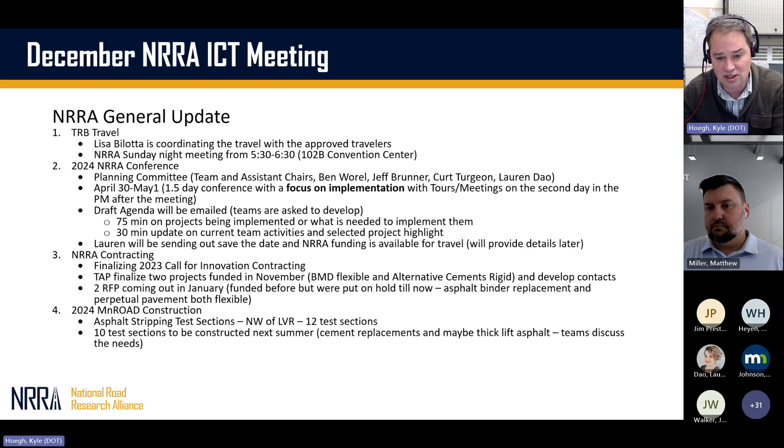So the two projects that we got our overview on last week for this group, as a reminder, are up on this slide here. Thanks to Dr. Nazarian for giving us a good overview last meeting, and thanks to Dr. Zegeye for making a lot of progress behind the scenes on what's needed to get that project funded. We're still working through a few things, like making sure we have a site to do our evaluation of applicability of NDE methods or NDT methods for the other project, but we're making progress and it's getting closer to being able to get that project started too.

So with that, we got a question from George Chang. Go ahead, George.

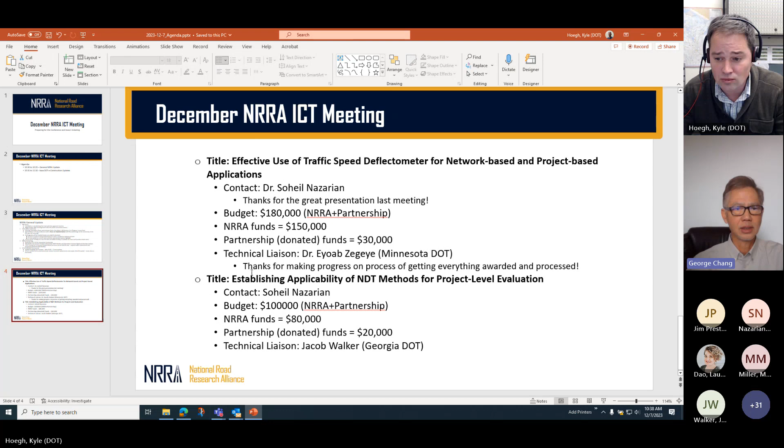Yes, I would like to share - we mentioned a couple meetings ago about having NRRA support the ISIC conference in September next year. Let me just chat here - it will be September next year. I'll share the link. From September 10 to 12 in Orlando, Florida. We have pretty much the program and the venue all set, all finalized.

So we'll send out a brochure to this group soon. Great, and then maybe, George, we can work together on that follow-up email I'll send from the meeting today. I'll also include some information on that, since that'll be of interest for this group. Thank you, yes, thank you, George.

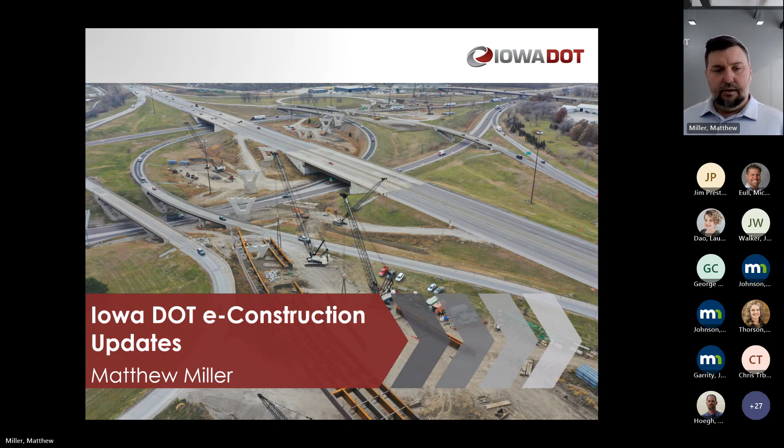So here's our Northeast Mixmaster project. It's a big project in our area that we're working on right now. Let's see here - so the first thing that I had to do coming into my position, I work with Sean Blazing, she does our GIS work in operations and maintenance, and Thomas Hamsky out of design. There's really been an effort to try to better communicate and connect some of those pieces. So the first thing that we do is we look at our project life cycle.

At least in Iowa, and I'm sure a lot of states out there are probably very similar, we start at survey, we create the CAD file, it goes to design. They create some electronic files that go to the contractor for sure, but ultimately the most important plan document is the PDF plan sheet. We get that in construction, we redline it, we create our Excel output files, and it goes into our electronic records management system. Then basically operations comes out and remaps everything with GIS and maintains the assets through GIS up until the point of survey, where we start the whole process over again.

So there's clearly some gaps there. Obviously, at those breaks, we're losing data and it's not being captured efficiently or quickly. So we want to address that.

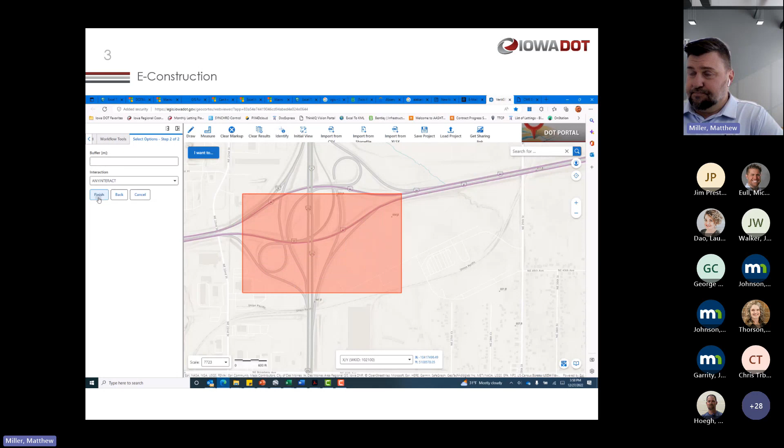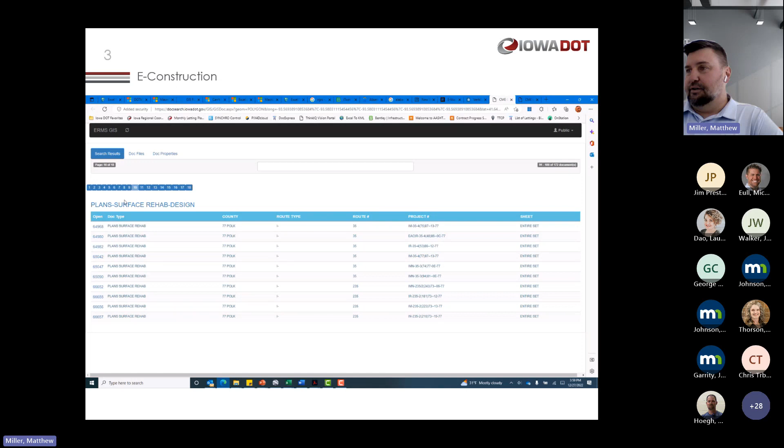Just to give you an idea of what our ERMS system looks like, it's on our GIS map - we can put a square out there and find all of our plan sheets. As a construction supervisor, I would have to go dig through some of these as-builts in the event that we had to repair something in the field, or in one instance somebody wanted to replace a light bulb. After a couple of days of searching, you can see I had 18 pages of plan sheets to dig through, and each one of those plan sheets may or may not have thousands of pages in a PDF that you have to scroll through individually.

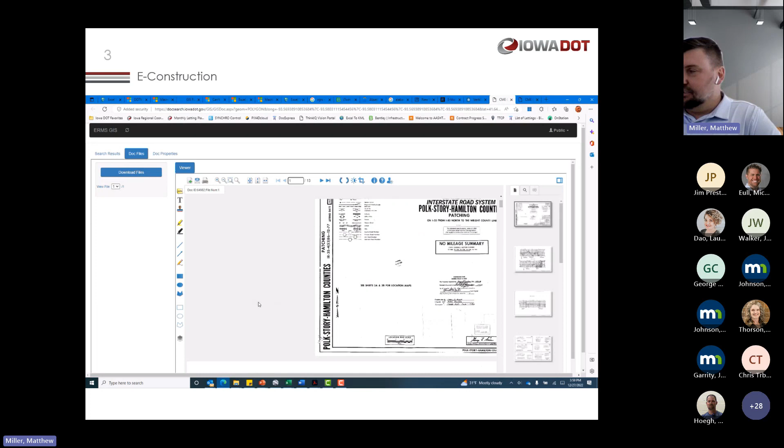It's a completely unsearchable database. You just basically have to have an idea of where you're looking, what sort of plan set it is, and hope that somebody wrote down the information you need - very inefficient. So we want to address that. The first step is probably, since GIS takes up half the life cycle, to include GIS through more parts of the life cycle. We've got these different file types like IFC 4.3, Synchro, our Excel files, our XMLs - probably very similar to what everybody else has. And then of course we've got AASHTOWare Project implementation going in there for us, and then bridge and pre-construction. So a lot of different software that's out there.

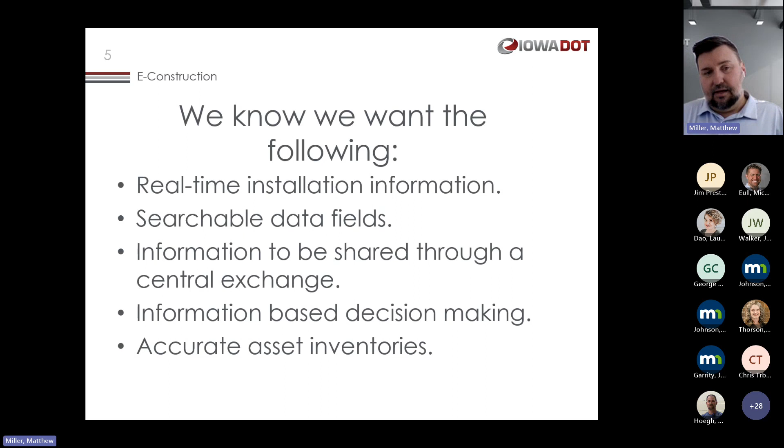We know we want to get to this point where we have real-time installation information, searchable data fields, information that can be shared through a central exchange if that's possible. Nobody wants to really maintain databases anymore—it's really just connecting databases through APIs. We want to be able to make information-based decisions, and we want accurate asset inventories. So this is where I come into the picture.

We have various initiatives going on between e-ticketing, GIS maps, 3D projects, drone LiDAR mapping, digital as-built, and technology pilots. For us, moving to an e-ticket portal—like we had started developing something like this during our I-74 construction—because we have all these different e-ticketing platforms out there: Fleet Watcher, SOP, Haul Hub, Connex, Istrada, Libra, Apex, XBE, TruckPay, Broadloop, Ruckit, Engage, BCMI, Trux, Astec.

We can't teach our people to run all these different softwares and accept tickets from these places. Plus, we've had some awkward conversations over the years. I remember Cedric telling us that he was asking Istrada to give us some air and slump fields that our inspectors could put in there. It's just an awkward conversation because you're dealing with a vendor that works for a supplier that's hired by a contractor that you actually have a contract with. So it's a very odd business relationship.

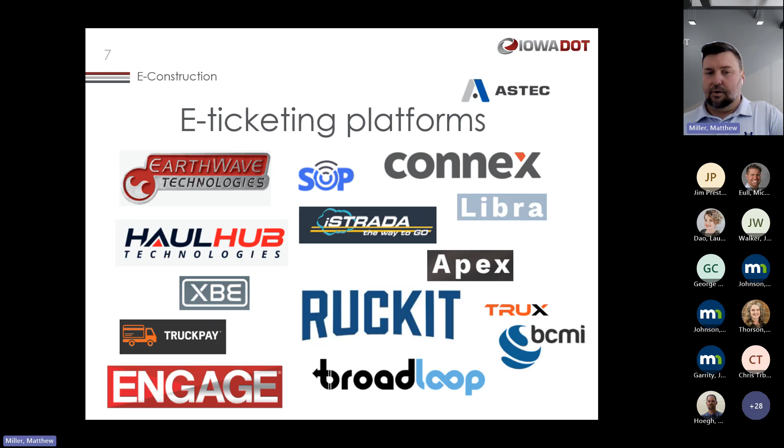So we want to pull all their information in through an API, organize that data, and send it to where we need it. That's where we started with Command Alkon and Infotech, and then eventually went to Haul Hub after an RFP process. Our information on an HMA ticket, e-ticket, is really basic.

We ask the same stuff that we asked for in a paper ticket—we ask for 12 data fields. On a concrete ticket, we're looking at 21 data fields. What we're able to get on an e-ticket is about 275 lines of data, so we're getting every part that's going into that material. We think this could eventually replace the plant report, potentially—you're essentially getting a plant report on each truck, which we would assume would save time.

There's other things that we're looking at too, like EV truck tracking, being able to evaluate production capacities and when projects could be complete. So there's a lot of really interesting stuff going on with e-tickets.

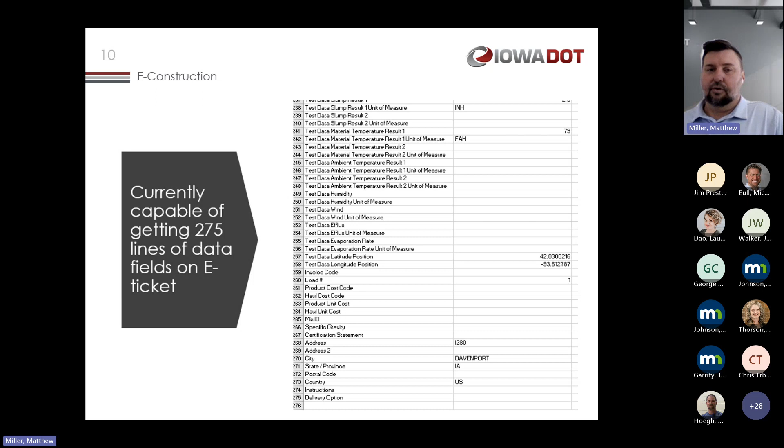The way our e-ticket platform works is if you have an e-ticket provider, which a lot of our contractors do, then we can just connect through an API into our system. If they don't have something, or if something doesn't work quite right, we can do a direct connection to their system, and both have shown to work pretty well for the most part. Occasionally, when we're dealing with two vendors that have to connect, they've got to get that data mapped correctly. There's also other possibilities of third-party integrations.

We've explored something with OnStation, which I'll get to in a bit, but we're looking at that now. We're actually kind of thinking being able to pull station location from something like OnStation will probably actually go into our GIS system, and the e-ticketing app will actually pull that data from our GIS system to track that. Essentially, it goes into our main portal, and then we can forward it out to AASHTOWare, DocExpress, our GIS system.

One of the first things that we had to deal with, and I think anything with digital construction, you have to look at this as internet connection. So we got a STIC grant, and we explored satellite. We explored various connections. Satellite was pretty much a non-starter for us because of latency issues—we had heard that it could take 30 minutes at points to get a message from them. So we're like, that's not really going to do anybody in the field any good if they're waiting 30 minutes for their ticket to show up, and it's left the project. Also there were some issues where they might have to set up a tripod and actually point a satellite in a specific direction in the skyline.

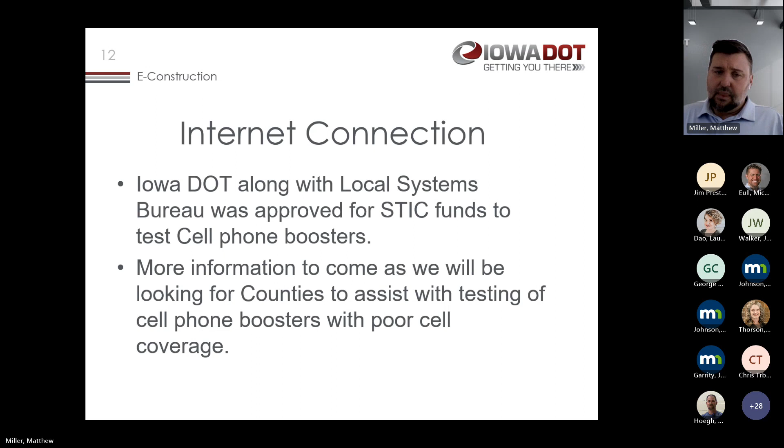So we looked at these suitcases, and we purchased them. They were recommended by the cell provider. It's a rugged suitcase that puts off a 300-foot Wi-Fi in all directions. We've had as many as 20 people connected to this.

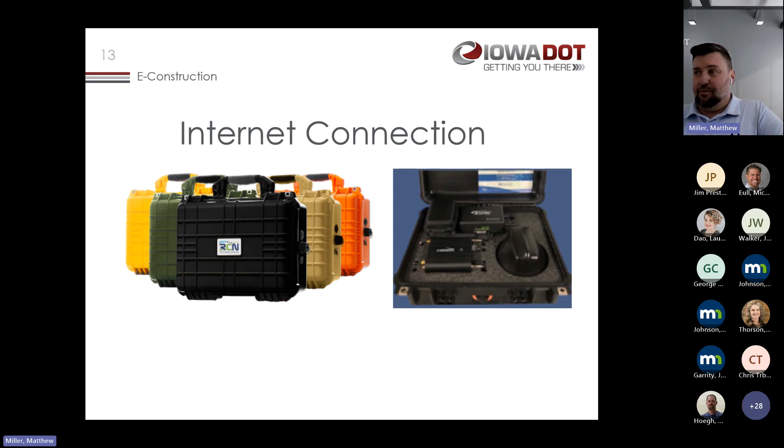We actually did our AASHTOWare training in our field offices using this, because the internet connection was poorer in our own offices than it was on this device. We sent somebody out, and I tried to test it out myself. I drove 50 miles, I live in the metro area, and never got off 5G. So we sent this out to somebody who knew about a dead spot where they had no service, and they turned it on and got a pretty good signal.

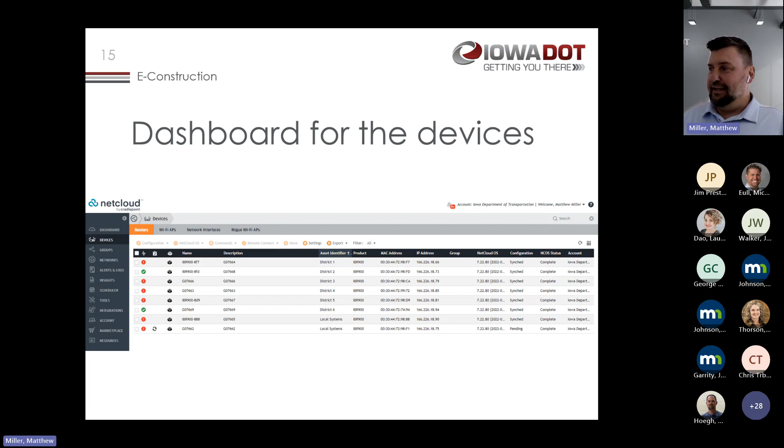It's got this dashboard where we can actually see where the devices are, who's using them, how much internet they're using, and it even puts it on a map, so we can really manage where they're at.

The feedback we got from local systems, though, is they didn't really want to buy this thing. They don't want to maintain it, they don't want to have to do anything like that. Plus, if we put it in the spec, we could get federal participation with it. So I wrote a DS, which basically specs out the case. I'm hoping this can be like my FHWA 1985 'you can use computer on construction jobs' memo, that pretty much covers us with all of our e-ticketing and any electronic endeavors. And if satellite does improve and goes beyond this, it's basically meet it or beat it. If you can beat these specs, we'll accept that.

We do figure that the contractors will probably build in most of their costs on the first bids, but we expect those bid prices will eventually go down. The units themselves are about $2,500, and in our case it's a dual SIM, so you have two cell SIM cards at $40 a month each, about $80 a month to run the equipment. But you can see exactly where it is and who's using it, so it's fairly easy to maintain. I'm hoping this has a second effect where the contractor has these in slow parts and maybe uses it themselves, finding value in getting connected and providing better feedback on their own systems.

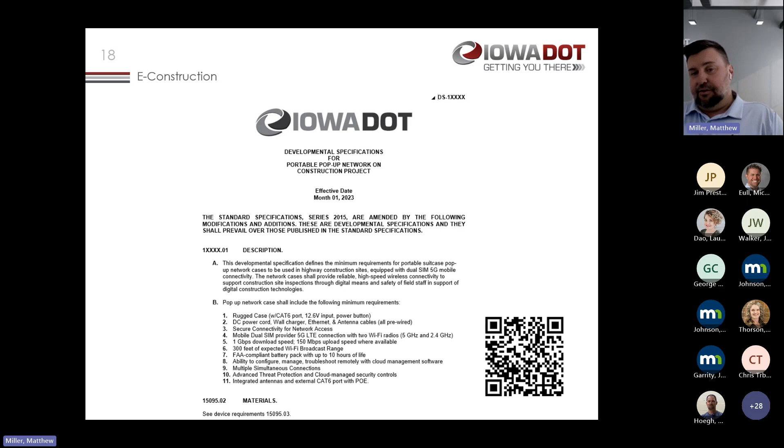It's really technical, it just goes into all the specs that were in that suitcase. We found that you could buy this off the shelf through a company like RCN that can put them together—ours is $2,500. Michigan actually built their own, basically using these specs, and just had to buy the components and put it together. I think they said they paid about $1,800. So somebody could determine if $700 is worth building it yourself or not.

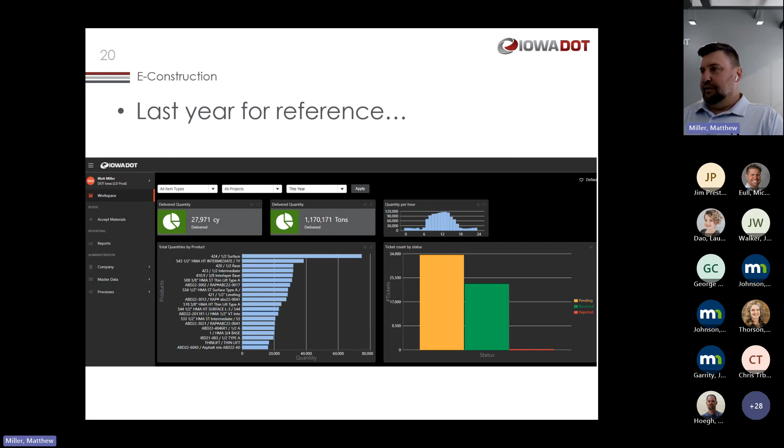So last year with e-tickets through Command Alkon, Infotech, we had completed about 28,000 cubic yards of ready-mix concrete and 1.1 million tons of asphalt. We had several projects, and some of that did tie back to previous to that year, but that was about what we had performed at that time, going with 100 contracts.

This year has been a little slower, but we've connected a lot of lower quantity projects. We've actually connected over 200 contracts since our contract started with Haul Hub in about the middle of April, so we started connecting jobs right away. We hit 200 contracts in 7 months, and that was our goal for a year. We're getting a lot of projects connected, getting people using it that hadn't been using it before, and that involves about 350 different connections between contractors, suppliers, and us.

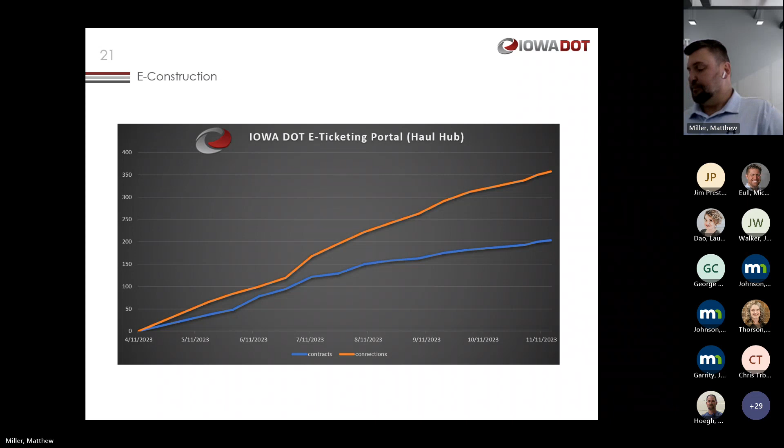Material-wise, asphalt's clearly the winner, hitting close to that 700,000 tons mark. But ready-mix concrete is moving up very quickly—you think 27,000 cubic yards before, well we're at like 170,000 to 180,000 cubic yards this year in 7 months. They're moving pretty quick.

We've also got some aggregates connected, not all of them, and I'm working on getting some of the bigger aggregates connected, like Martin Marietta. They've actually connected in other states, so I would think it wouldn't be too hard for us to get connected too. Some of the aggregates we've reached out to, some of their stuff's computerized, others we're still writing hand tickets. I'd love to get every one of theirs, but I'll take the computerized ones for now—we can deal with the handwritten ones. But all the ones getting computer-generated tickets, let's get that information in, save our people the effort on those projects, since most of the time those are the larger ones.

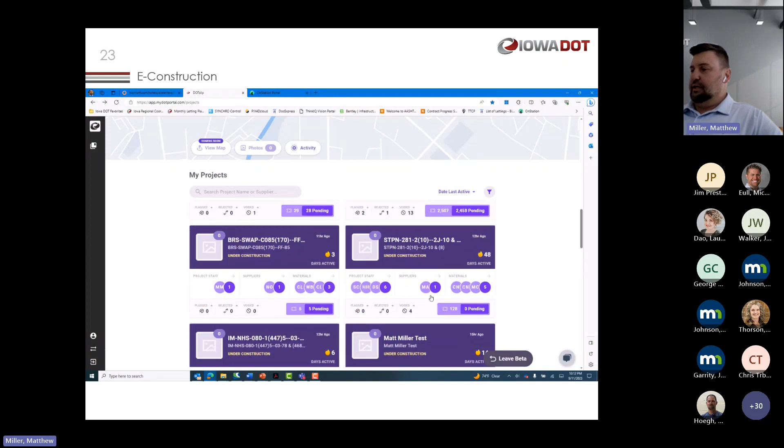When you actually click into one, you can see one thing too. This is the one problem that we have in Iowa: our contract number might have many assigned project numbers. This is the one thing we've noticed digitally, and one of the things that prevents fully automating the connection process is I have to bundle those into a single line a lot of times.

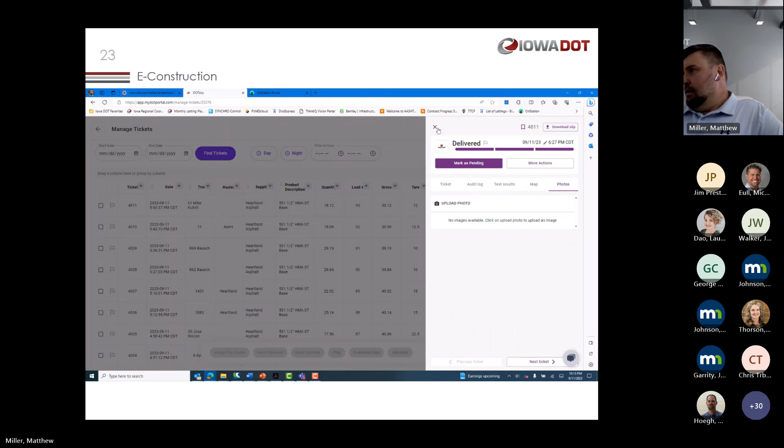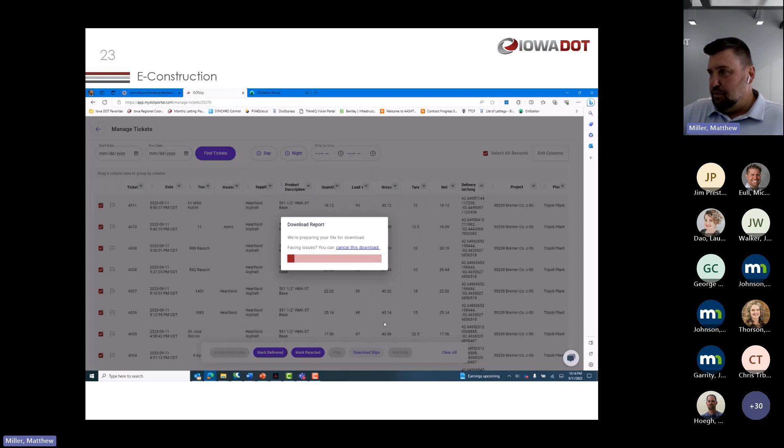So I'd actually worked with ChatGPT to create a macro to create a Google Earth file. I could have made it through an Excel sheet, download a CSV, do this, but I actually sent it over to Haul Hub and said, can you just make this an output on your website? And so they created it, and it pulls all the fields in. Then you can open up a Google Earth file, and it'll take you to where all these tickets are and show you all the fields.

When we download that, we zoom in, and if you click on any of these ticket locations, it'll give you all the data that we've recorded from that ticket - item number, how much weight was in there, design thickness. In this case, there's a lot of whatever fields were captured that we can report.

And this is all a precursor to moving it to our Esri system. So you can get a lot of data, map it, and start to really see what you have out there. Of course, you get the CSV files, and you can get PDFs if you need those as well for all of your project documentation.

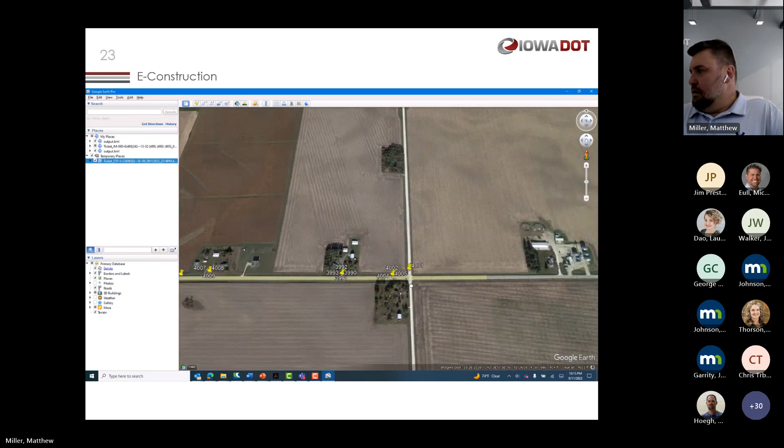One thing you'll notice is some of those tickets will be offline from the roadway. That's because it's marking where the inspector's at, which I'm working on through the spec. Ideally, we would get to a point where there's some sort of electronic proof of delivery - either a camera, a smartphone application, GPS, RFID, or one of these other methods that would actually put it on the contractor to prove that the delivery had occurred.

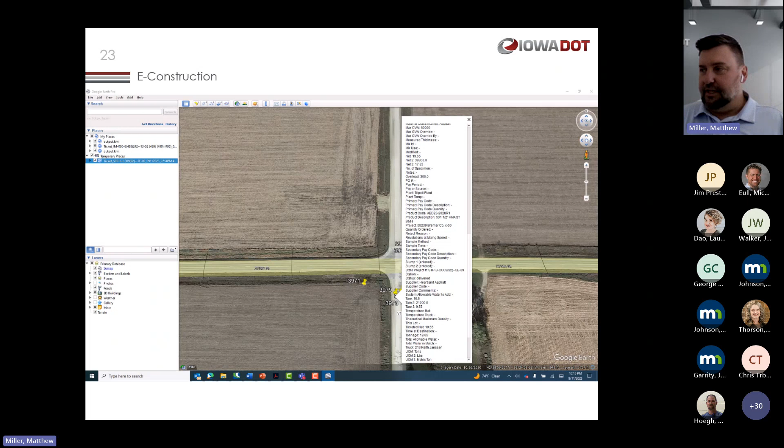You can see that we can see all the loads, and which pay item it's attached to. So the fact that it's off center doesn't really bother me because I can tell if it's mainline or not. We are working on ways that we can maybe associate that more to a shape rather than just a dot on a map - but we'll eventually get there. The fact that we have these on a map in the first place, I feel is a pretty good accomplishment.

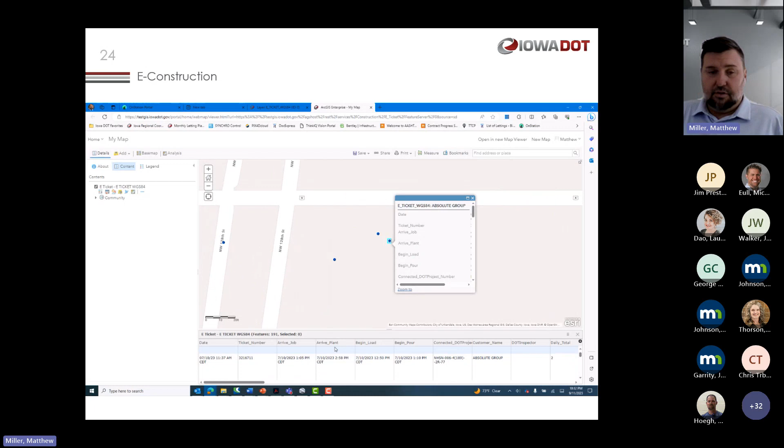We don't even have all the analysis tools on here, but we did some examples of what the analysis could look like for this case, where we have a time lapse. You can see the scroller down here and the time changing, with each load as it comes into the project. So you're actually seeing the project built digitally in front of you.

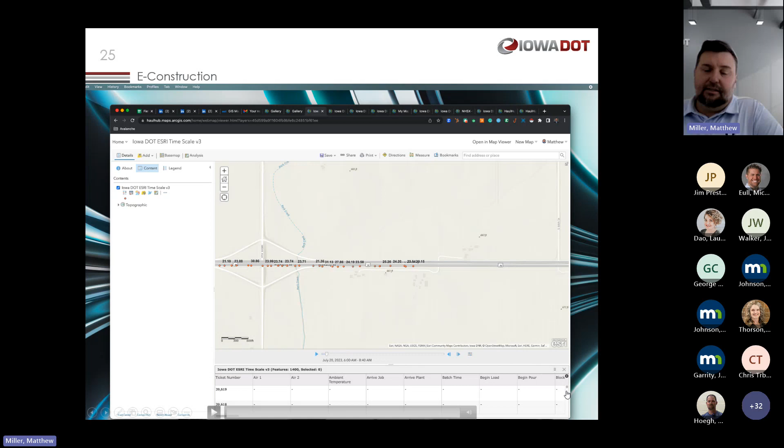There could be obvious uses for this when trying to determine which haul routes were taken, what sort of production schedules you're hitting, are there working day arguments to discuss. There's also been talk of whether we can start to track DBE trucks if we know a truck number and the company they're driving for, and associate that to a driver's license. So there's a lot of potential we're finding from an e-ticket, which is pretty exciting for something that used to go into a shoebox.

Our pavement map on Esri looks like this, and I imagine everybody's got something kind of similar. Ours is a bit generic in that there's a lot of fields that aren't filled out. We put that it's 10 inches of concrete or 2.5 inches of asphalt. We're not really tracking where mix changes happen and admixtures change. Now we can offer that through a layer.

So I can either export all this data and bring it in manually, or what we're actually exploring, and I know Haul Hub's been working with Esri on this, is to have a feature web service where we would just push this live, get real ticket information as it's being placed. That would do a couple things: it would verify the roadway has been worked on, and it would also give you an up-to-date, real-time as-built with real information as far as what pavement's out there.

And with certain analysis tools, you could actually start to examine some of your specs and think of your product life cycle, and really come out with some good performance specs, I would think, from information like that.

We're also looking at things like sample timing. To me, it would be great if the application would tell an inspector that they're due for a sample. They're marking the pay item, they've taken a sample, maybe it would suggest, hey, you're probably due for another one. Let's try to avoid missing samples and tests in the first place.

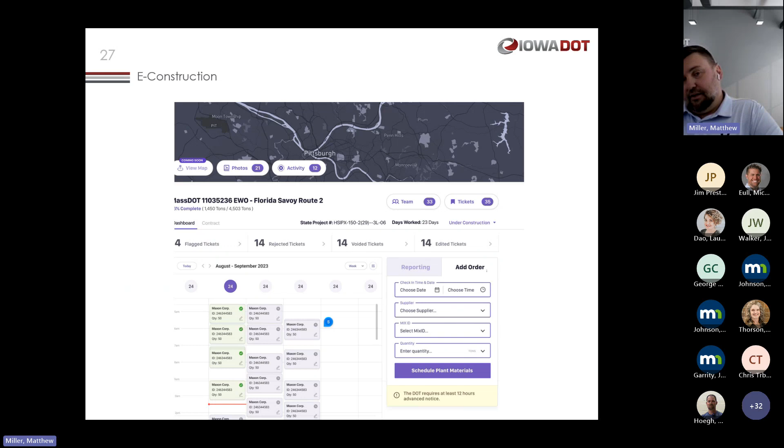We're also looking at other materials beyond just the big three. Concrete, asphalt, and aggregate have always been the main focus, but there's other information that tracking geolocation and putting on a map would be really helpful for. So you think of the underground utilities, conduit, pipe, the things that are hidden, to be able to put those on a map, as well as your signs and other things.

It's tricky when you think about some of these things, like steel, for example, raw steel that's been epoxy coated, galvanized. There's a long chain of custody, so how do you digitize something like that? You almost have to start at inception and then have a method all the way through the process.

I don't know if we'll ever get there, but what I do think we can do is digitize some of those fields and attach the PDF. That way we can assign geolocation, put it on our Esri map, and we'll just have to determine which fields we really want to track and keep there, and which ones can reside through the PDF that somebody can find. At least at the start, that's kind of the goal.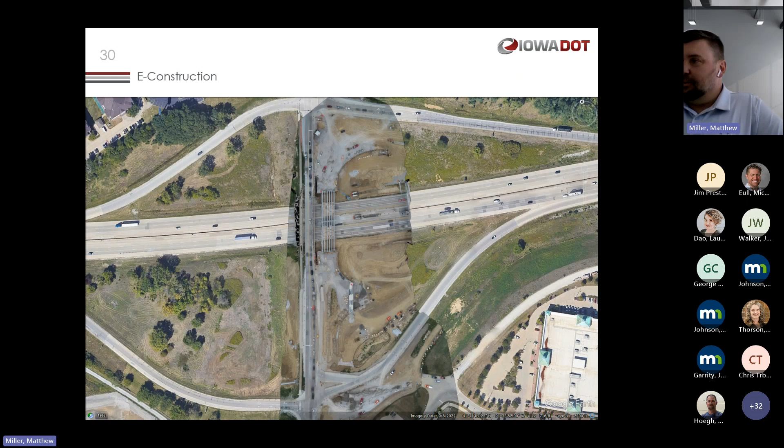So just to give an idea of what we're thinking when we talk about a digital as-built, here's a Google Earth image of a bridge we're working on. When we add the GeoTIFF, now you can kind of see the construction as the work is happening. This is from a drone flight, about a 30-minute drone flight over this area. Now I add the design line work so you can see the intention of the job.

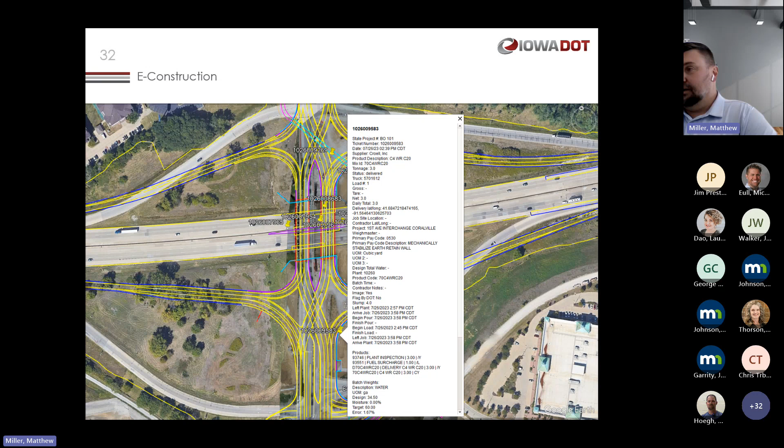And I bring in the ticket information, and to me, this is starting to look like an as-built. It's all digital information. This didn't really take anybody an exceptionally long time to make. Like I said, a 30-minute drone flight, an inspector hitting receive on their phone, and we're already tracking information live. We have more information about this project than we probably would have had otherwise.

Earlier, I said we're trying to get them to digitally capture when a load is delivered. So we've done some cameras on pavers. As an example, there's been talk about doing maybe an RFID chip. Personally, I do feel that the drivers using whatever the hauler's smartphone application is probably the most likely and affordable for most people, where it's on the driver to actually hit that they delivered it and where they delivered it.

This camera thing works pretty interesting. It's got an AI function that reads the plate and associates it to the load based on the timestamp and some license to truck numbers, and that's how that associates it. Think of it kind of like Amazon when they took a picture of that box they drop off on your front porch. Essentially, they're saying, here's this load and it was delivered. Having a picture is a nice feature, but it's just going to be one of many choices.

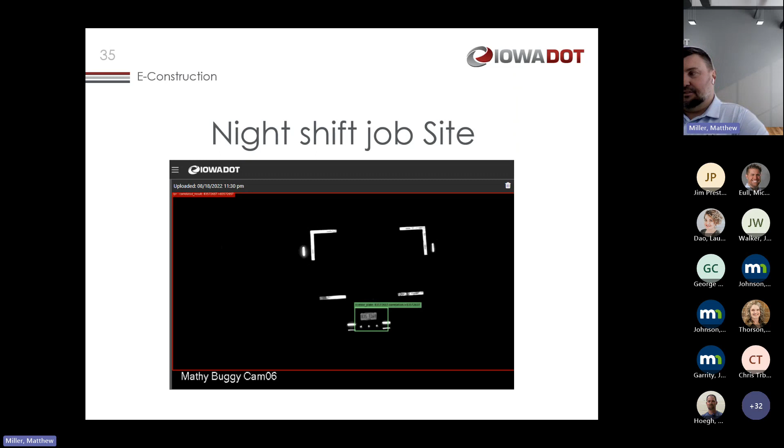The other piece is e-tickets can now go into AASHTOWare. So we're implementing the AASHTOWare project. We got delayed a little bit with some of our financial stuff changing over. We went to Workday a couple of years ago, and that kind of slowed down our progress there, but we're working on it again. Really the thought is when that inspector receives that load on the job site, it sends that information into the pay system and into the asset system seamlessly and without really extra involvement from the inspector.

So Synchro, and I've heard you guys are going to use this too. So I have a few thoughts on this product.

What's important to know with Synchro is you're essentially taking a file that was made on a high-end or a higher level computer, and you're making something that's visible on an iPad. There's obviously some inherent issues with that. For one, when you're using it, sometimes it can be a bit tricky. If you're assigned a zero coordinate, sometimes you might zoom past things. So it can be a little encumbering for users the first time they're looking at it, especially if they're not used to looking at some sort of CAD software before. But I do think as they use it, there will be the benefit of picking up on things that designers tend to talk about. So knowing the grading, knowing which model number they're using, knowing how they've labeled lines and areas, I think that'll be a benefit for sure.

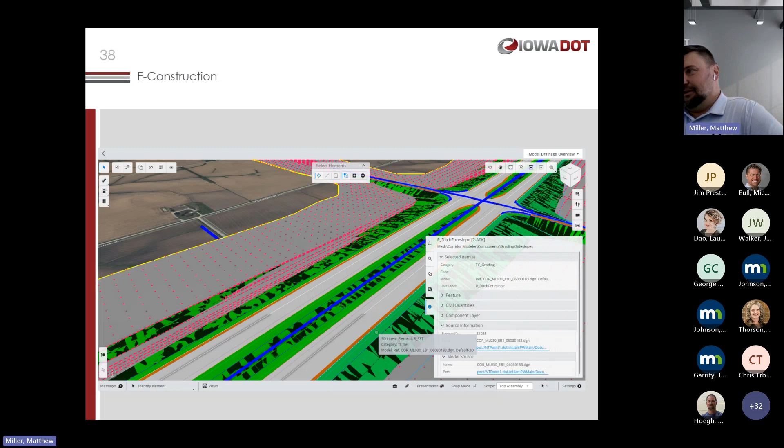So one thing I've tried to do is we've used Synchro, and for a lot of things, they tend to use it for cross sections, and they've compared with the contractor. We put this through Synchro using Bentley. They brought it in through Trimble Business Center, and I think their model ended up looking a little different than it did on the Synchro app, and I think mostly side road connections. But we're working through it.

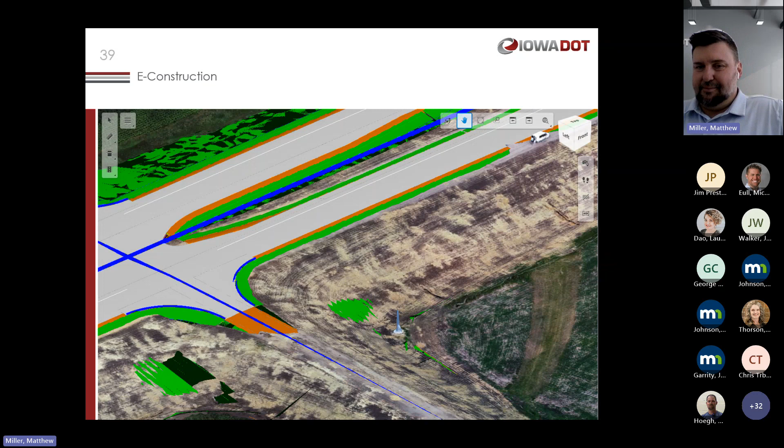So another thing we did is we brought in some drone imagery, and I think the drone imagery was really detailed. We used context capture. You have to use the Bentley product with the Bentley product, but in this case, we used context capture. The only downside I had was that when I cut a cross section, it didn't compare the drone imagery. So you can see here, when you cut a cross section, it'll show you the slope and everything, but you can tell there's no imagery of where that drone line ends up. There's other software that can do that, and that's the only reason I bring it up.

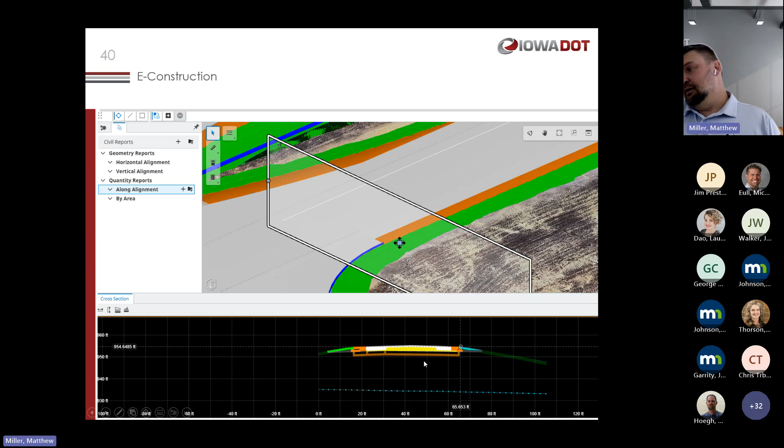But another thing, I wish it would identify top of slope and toe of slope immediately, like it does on the plan sheet. Instead, you have to scroll to that area and that area. And I get why it does it, it's a 3D model, you can move around, and technically you could be just about anywhere. But I think that'll cause confusion and disagreements in the field. So that's something they are looking at.

Another thing we're looking at is connecting e-tickets into the model, because that was something we did with the I-80/380 bridge. We put shop drawings into the model, Excel summaries and things like that. So it seems like that was the direction we were going.

Plus, I do like the idea if I can put a ticket package to a specific element and say, this is the one that went in there. You could compare quantities, say, did we meet 105%? As we track the life cycle of it, we would know exactly what we were using it for, instead of it being a dot off to the side. So there's some benefit there.

But the question is, how do we do that? Do we have a drop down on our e-ticketing app that says PCC shoulder and lists all of these elements on the app? Or do we send a packet from the e-ticketing app into something like Synchro and have Synchro assign it? We're still trying to figure that out.

So here's some of the 3D modeling software. On top, this is OpenBridge Modeler. This is a program called ProStructures through Bentley, and this is Synchro. So in this case, you actually need three different softwares to see everything you could see on the plan sheet. That can be one of the other issues they have.

I know in Utah, they're using Synchro on a bridge, and they were able to see all the bars. They had an interesting issue when we went out there to T2. You think you give a model and then they set up the staging. Well, it was like a split bridge deck with a closure pour at the end, something a lot of us do, and they actually had to break it out for the contractor, the staging of it.

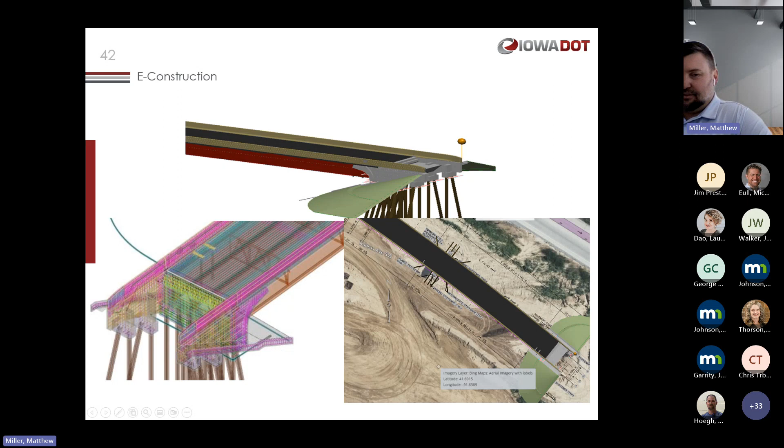Another thing people pointed out was a rebar schedule and how people miss that. I think there are certain things on a 2D plan set that you get used to seeing, and when you go to a model and it's not there, that can sometimes be disappointing. But I think all these things are evolving.

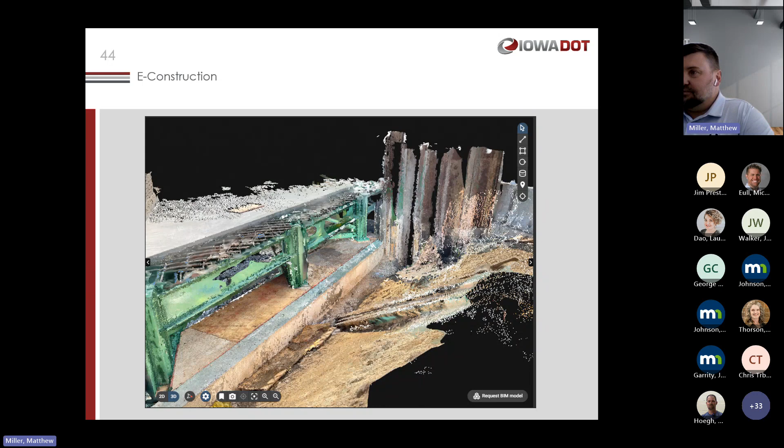So you might ask, well, what's the accuracy on something like that? So we actually tested it. This is a salt shed. They wanted to see if we could calculate the volume of the salt. We knew exactly how much salt was in there in tons. So I walked around with my iPhone, which was the penny iPhone 6 at the time.

I scanned this whole area, so nothing special LiDAR-wise. And I calculated the volume, came back, and compared it to the bulk weight that was on the manufacturer's website, which was 71 pounds per cubic foot. And I came back 82% accurate.

To be honest, I was disappointed with that. I didn't think that was really great. Well, after talking to maintenance, they said that weight was from like 40 years ago, and that they actually tracked the weight, and it was closer to 83.5 pounds. So I reran it with the 83.5 pound weight. All of a sudden, I'm 96.5% accurate, just off an iPhone walking through a shed. So I was very happy with that.

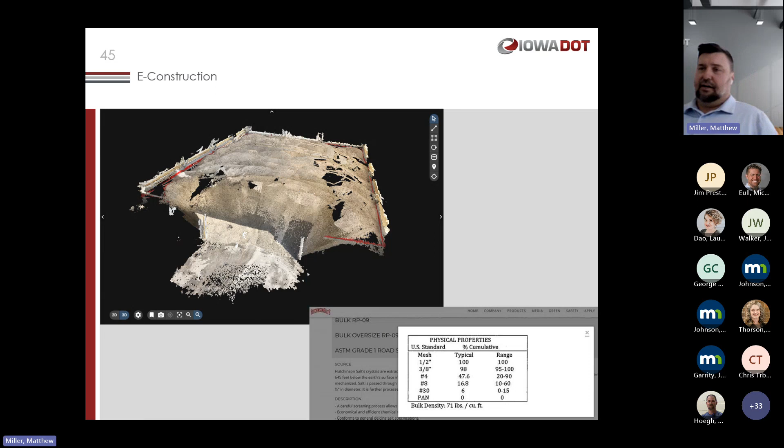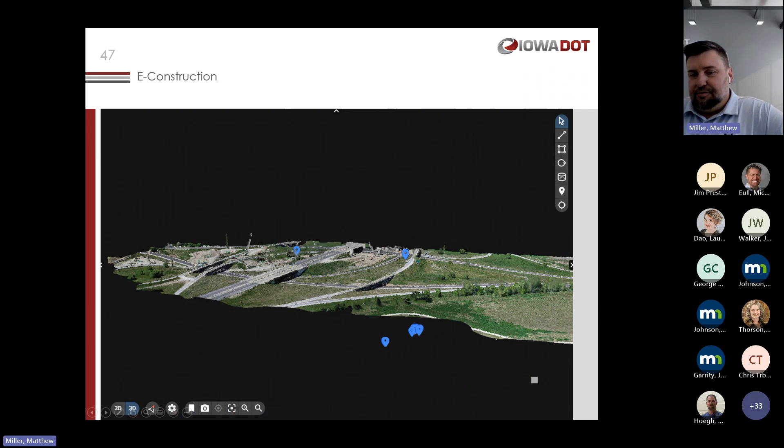So another test I did, I actually pulled e-ticket data and put it into a Pix4D drone flight that we had at the East Mixmaster. You can see here, just from what I'd flown, this was the area I was able to cover before I ran out of battery. What's interesting is the e-ticket isn't necessarily assigned a Z coordinate, but when I put it on the map, as long as it was over the map, it attached to the ground. The others kind of went into outer space, but it's just another tool to view those e-tickets as you're moving through construction.

So with Pix4D, we don't spend a lot of money on there—I'd say around $10,000 a year to cover, and that's our enterprise solution across our construction offices. But we have another program called Propeller. Now this is for power users, quite a bit more expensive at $13,000. It covers one drone, unlimited projects for the whole year, but it's only one drone.

Here's an example at Sugar Creek. The first part was the drone flight. The second part, this is bringing in the IFC model of the bridge. I did put a QR code on here—I don't know if you'll be able to see this, I haven't tested this one out, but hopefully it gives you a link to this project. You can see where the pictures have been taken on the iPhone by the inspectors in the field.

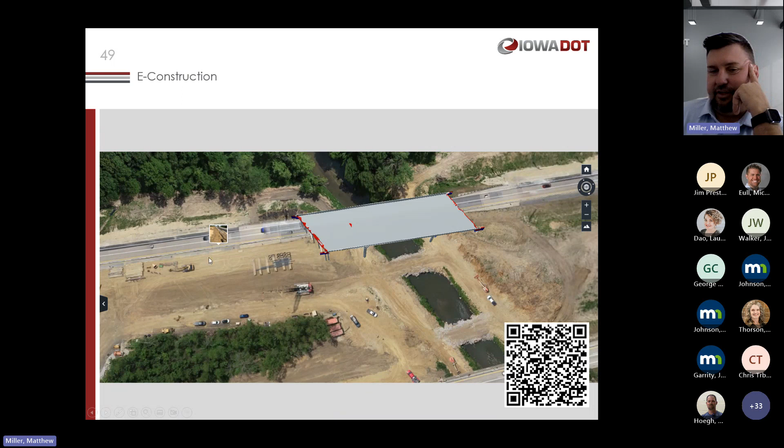You can pull in the terrain. You can get the station and offset right down the middle. Here's just the side view of that terrain.

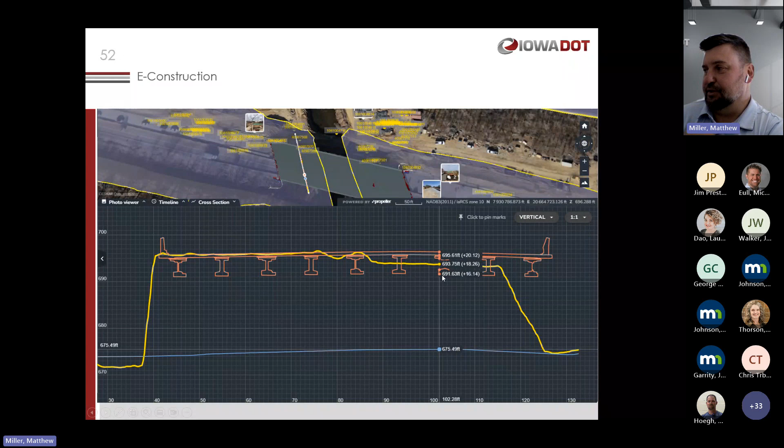Here's actually cutting a cross section now, across the IFC bridge. You can see the blue line is where the ground terrain currently is. The yellow terrain is the terrain that's supposed to be built, and we have the bridge as it's supposed to be built as far as the cross section. So it gives you the elevation heights for all of these too. Just really interesting stuff.

We also brought e-tickets into Propeller, so we can actually see where all the tickets lined up. These are all different concrete tickets for this bridge project, with the line work, with the IFC model. Just really interesting stuff.

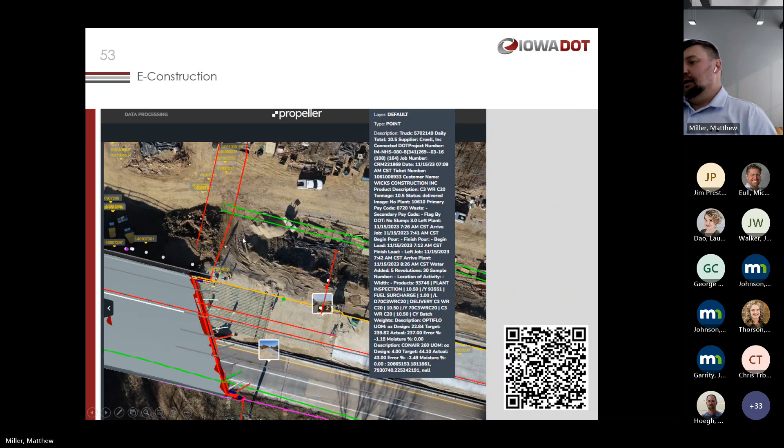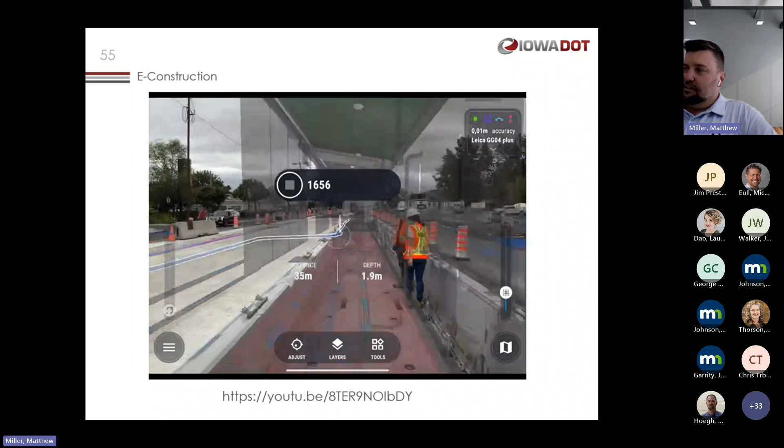Another cool thing with the scans we do, there's this program called VGIS. We got a license, an iPad Pro, and a Leica antenna to test out because we're going to look at rebar. But here's an example of what it can do—it's an augmented reality software where you bring in the project, change the opacity, see where the project is, and pull measurements right off your phone.

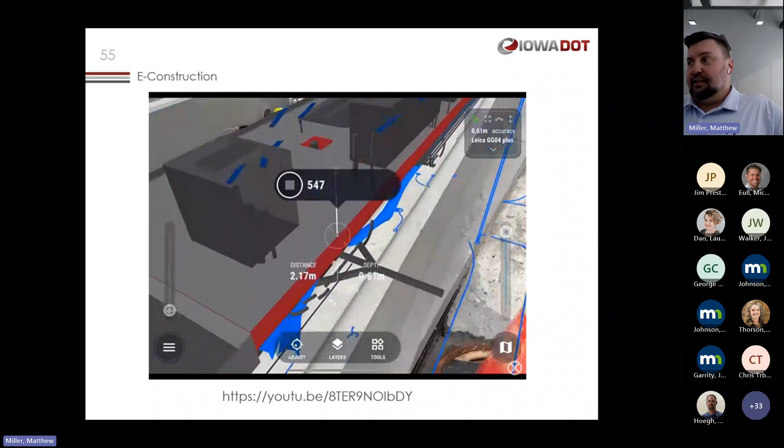Really helpful with underground utilities if you think about it. We were going to test this out to see if we could see rebar and try to line it up with what we're doing in the field. I think that pier ended up getting done by the time Thomas got the order delivered, so we're looking at another project to test that out on.

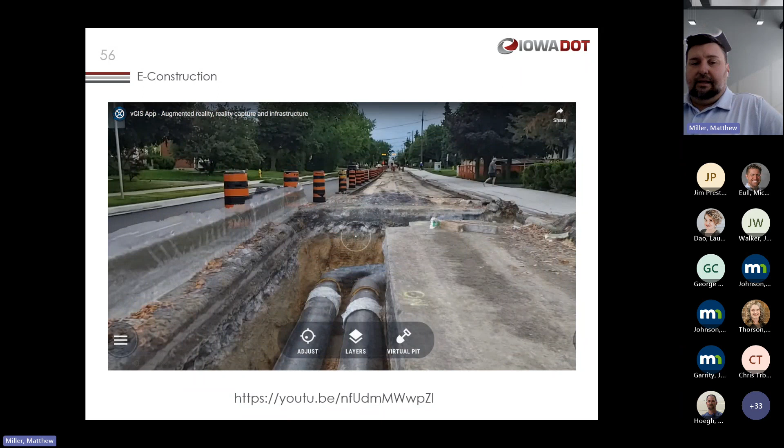But here's an example—they actually use the Pix4D scans and anchor it to the ground. Someone did a scan of this pipe, and you can see this is augmented reality. They're holding it up in real time, changing the opacity, and it's like they're looking through the ground.

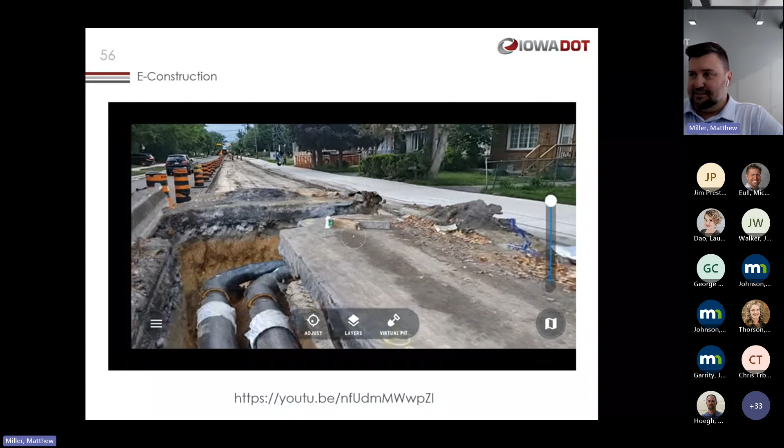I think this is really cool. As somebody who's run an excavator, if you had something like this available when digging through conflict areas, maybe some of these larger utilities that are really dangerous, how helpful could that be for you in the future?

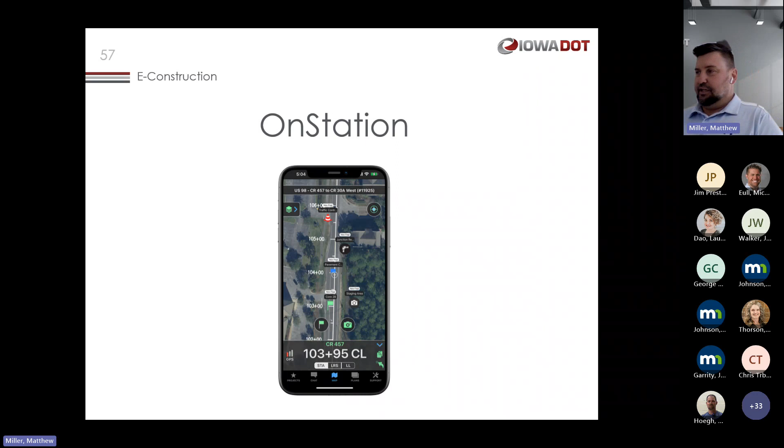Another program we use, which is also a digital delivery tool for us, is called OnStation. 3D models are great, but that's not the majority of our projects—most are still very much 2D. So we need a good, simple 2D solution, and that's what this app really does. It gives you station and offset wherever you're at.

You upload a land XML file, and when you zoom in or wherever you're standing, it'll give you a station and offset based on that alignment. It has station, linear reference system, latitude, longitude, and also mile markers.

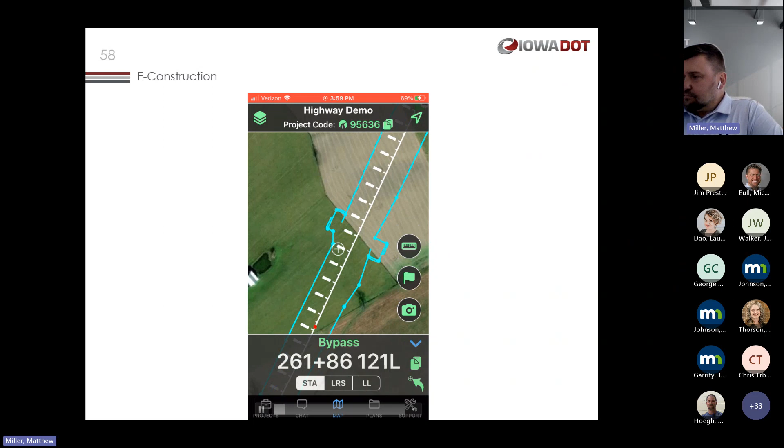We gave them access to all of our mile markers so they get out to the thousandth, which is how we measure. You can drop flags, take pictures, and it'll stamp the station location. You can also do short measurements in feet, yards, miles, or acres.

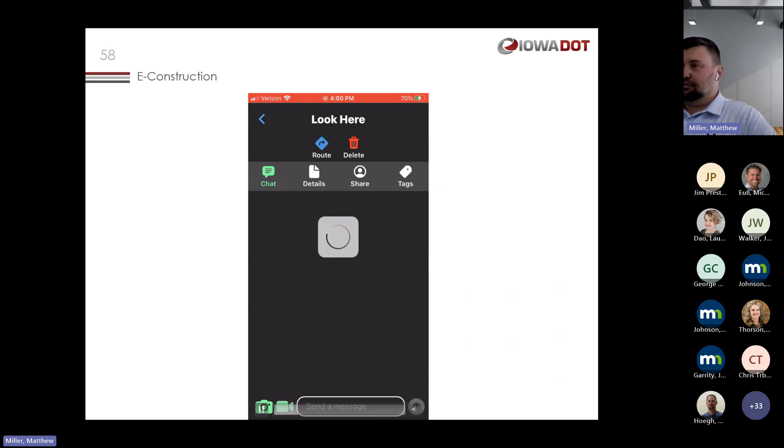It also holds the plan sheets. You can put flags, and get Apple and Google Map directions to whatever you flag out there. We also upload a CSV of all the bid items so you can tag different items out there. It's just a simpler way to communicate in the field.

And we asked them for different outputs. You can see the station offset on that picture right below. You can also see that route button up in the middle, so you can route to any of the locations that these things were at.

So in this case, I'll pull up an Apple map. I was just looking at a demo project when I recorded this, so it's 9 hours and 58 minutes away. But you can see the benefit right there.

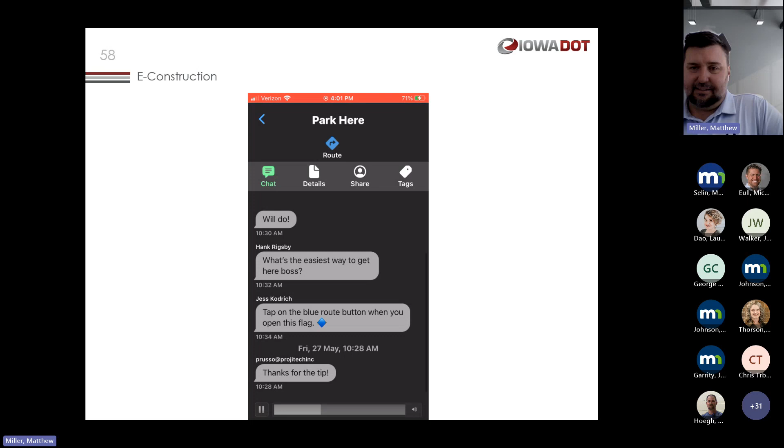People report that, depending on the accuracy of your phone, you can get 10 to 20 feet accuracy. You can certainly put it onto a GPS antenna and improve that accuracy greatly if you have something like a Trimble antenna to connect your phone to.

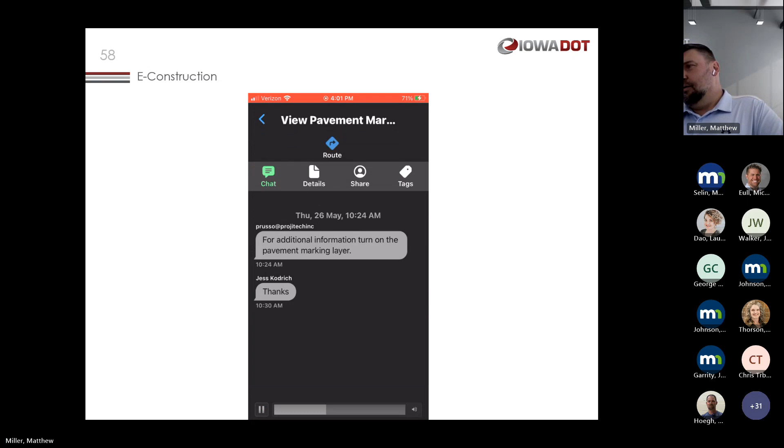But for probably 90% of what we do, just getting a station location of an observation, or knowing if you're in the right area, tends to cover you for a lot of things. Some of our inspectors that have an RTK rover available have reported using the RTK rover less because they have something like this open to them.

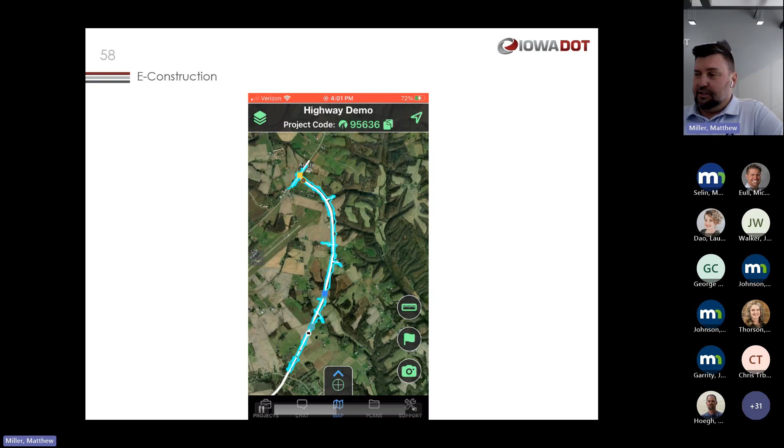You can also pull in line work. We actually got all the right of way across the state. This person did an example where they took some core tests and recorded those locations. We could also put in the garage limits where certain maintenance garages end.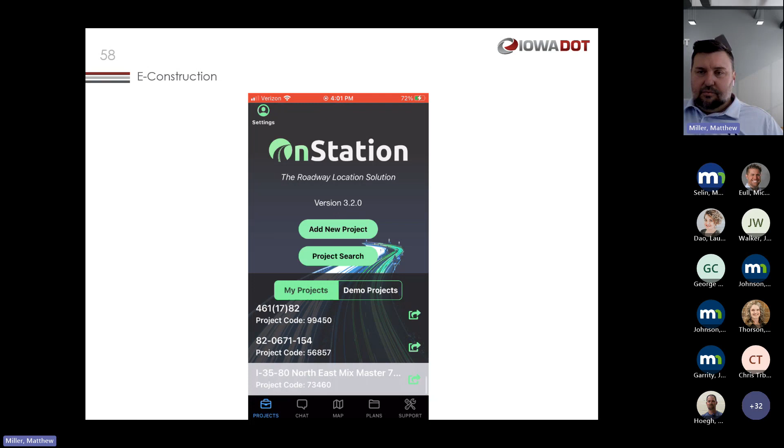We're doing a test project right now with some of the patching to try to get an Excel output for design, but also have these locations stored under a project number that we can use ourselves or share with contractors. What's nice is if you're in a place with a lot of alignments, it'll just jump to whichever one you're closest to, but you can also lock in which alignment you want to stay on.

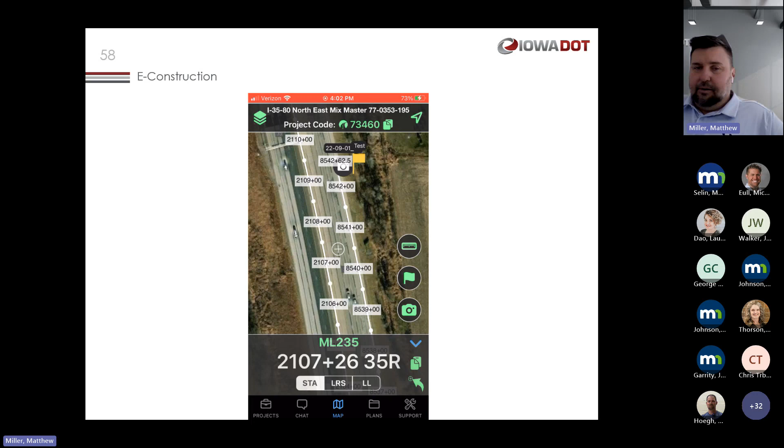It seems like it works pretty well—we've had really great feedback from people in the field. I was able to purchase this without even going through an RFP. We were able to use the OCIO umbrella agreement through a reseller, so we could just purchase it right off the shelf. That's been nice.

We gave them ProjectWise access, so they've started creating projects for us. It's just been kind of a handy tool.

You can import flags to projects, and export a project to GeoJSON, KML, CSV, or Esri GeoJSON. We're actually talking with them right now about a feature web service where we could potentially push the stationing alignment into Esri Field Maps or ArcGIS, and then other users could pull that data.

So our e-ticketing company could actually send a request, hold that station and offset, and attach it to a ticket, which seems like a better way for us to go than trying to get the two to work together. If we can pull this information and make it available, it might be a handier way to resolve any issues, whether they're looking at each other competitively or not.

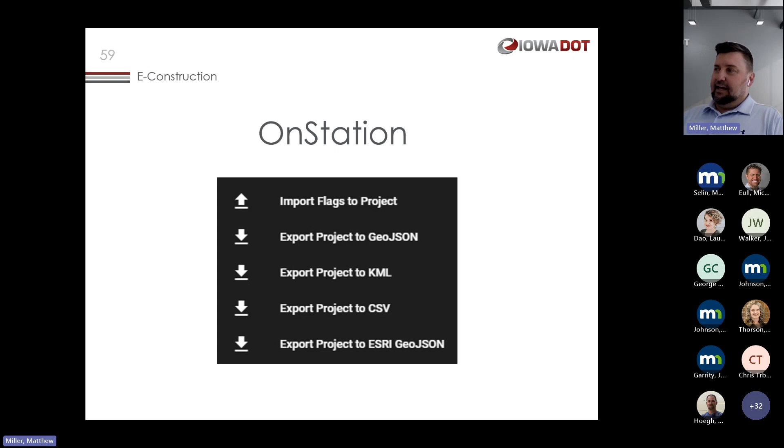Another thing—we're doing a project with 1,300 signs, a statewide signing project. We've preloaded those into this application, so we're testing that out, and we're hearing really good response back from our inspector.

Another thing I've worked on is GIS utilities—geospatial mapping of subsurface and underground utilities. This is based off of the ASCE 75.

I went out to TRB last year, which is where I became familiar with this ASCE publication. We had some construction staff basically reporting that even on our own utilities—we like to complain about other people's utilities—but even our own stuff, a lot of times the person who would go out and make the determination of where the utilities were, sometimes the best information they had was the design file.

They're going off of where it should have been rather than where we actually put it. So we wanted to address that, wrote this DS, and it goes into effect. It went into effect last month, actually, so we'll start seeing that on some projects. Essentially, it requires levels of positional accuracy.

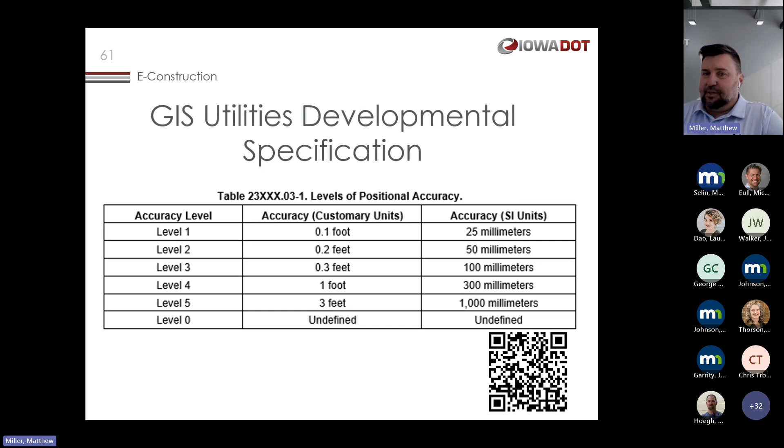I had to pay ASCE like $250 to use some of these tables. I took their 38-page document and squished it down to a 6-page spec, just because my experience in the field has been the longer the spec, the less full compliance you tend to see. So I wanted to make it simple and clear cut for them. We covered it in about 6 pages, with 5 tables.

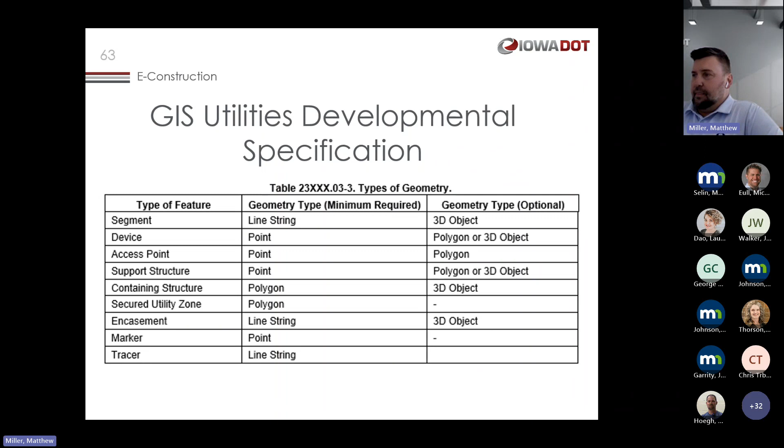So I have another table for the feature types. I try to give them an example of what that looks like for the ones they should be tracking. We're also creating some geodatabase files that will hopefully make this simpler, and we'll see some consistency as far as the data turned in - the types of geometry, the feature type, what's the minimum required and what's optional, because there's so much variation in what's mandatory versus optional as far as what we would capture, and most importantly, where to send it.

We found in a lot of cases, like boring companies, they'll actually create a file and they don't know where to send it to, because we haven't had that clearly laid out. I'm guessing Minnesota has that laid out a little better than we do, maybe. But we set up a shared email to deal with this at first, and we're going to see what comes in for different file types.

We're also using our AID grant money to explore a front-end web page that can do some of the QA, QC on the deliverable as it's uploaded. But I'm also paying people by the linear foot for what they turn in, so we're hoping we see a good amount of mapping recorded and delivered to us.

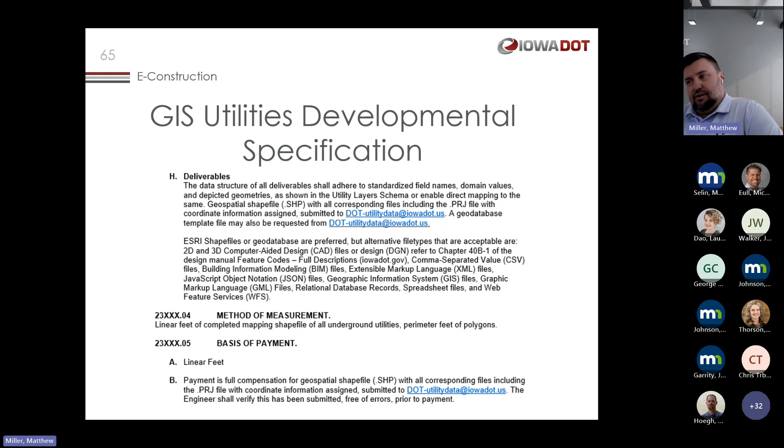I'm also working on a connected equipment special provision. We're going to capture things like equipment ID, engine state, latitude, longitude, fuel percentage, cumulative engine hours, cumulative fuel consumption, heading, speed, and when it's created, as just some basic things. We actually had conversations with GOMACO, and it sounds like we can capture percentage of slope and vibrations and all sorts of other information off of that concrete paver. So we're hoping to test that early in the spring here.

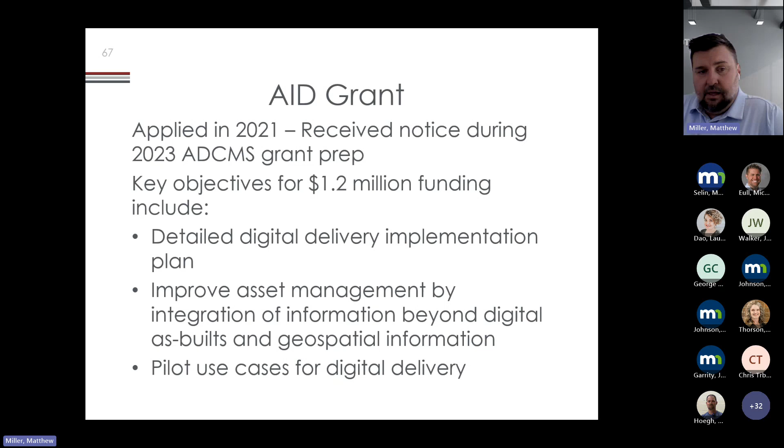We did get the AID grant for $1.2 million, and that's for a detailed digital delivery implementation plan, to improve asset management integration through integration of information beyond digital as-built and geospatial information. We're going to pilot some use cases for digital delivery, so we're hoping this is going to really help us out quite a bit.

We also got the ADCMS grant, which is hopefully going to turbocharge this thing. We didn't ask for as much as some of the other states - I think there was some concern over match money and what we could expect to get done in the time frame, so I think we only asked for about $1.5 million on this one. But we're hoping that this will resolve some of the issues we're having.

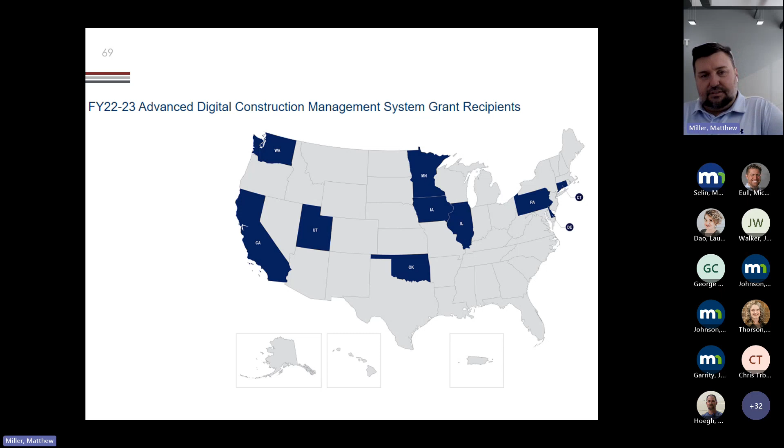So we're going to really focus on 1 to 3 assets, and we're going to focus on open source solutions for bridge design and deliverables as far as the IFC model. Of course, Minnesota was one of the other states selected, but there's 10 of us, so I know we're all kind of focused on similar things, and I'm hoping some great stuff comes out of that.

We do have some 3D digital delivery BIM projects starting, and these were set to start before we had any of this grant money anyway, so we were kind of focused on it already. There might be some additional things we can expect to get out of these projects now that we do have some aid grant and ADCMS grant money to work with.

And I guess, do we have much time left? We only got like 5 minutes. I did have one other thing, I guess, that I wanted to show real quick.

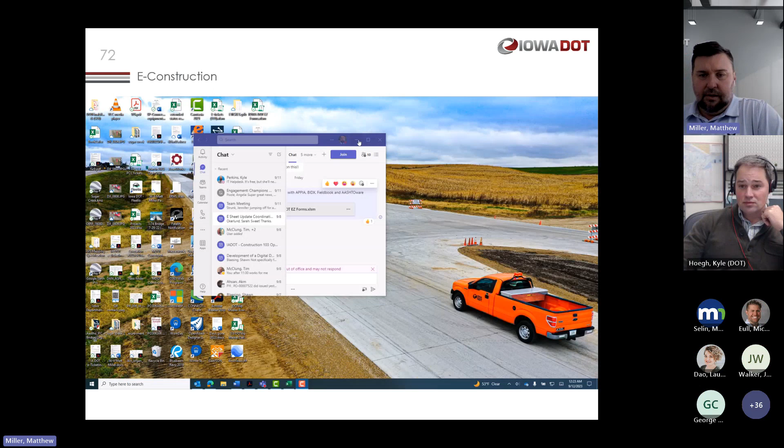So my wife bought this exercise bike, and this is the 3D stuff. We've been hearing from the contractors that this 3D thing is bad - they don't like to deal with it, it's too much, maybe we started with too much to begin with. But I use this thing as a 3D model app.

Can you guys hear this? No. Okay. So you can see it's a model that you can move around. Now we can - so you can hear.

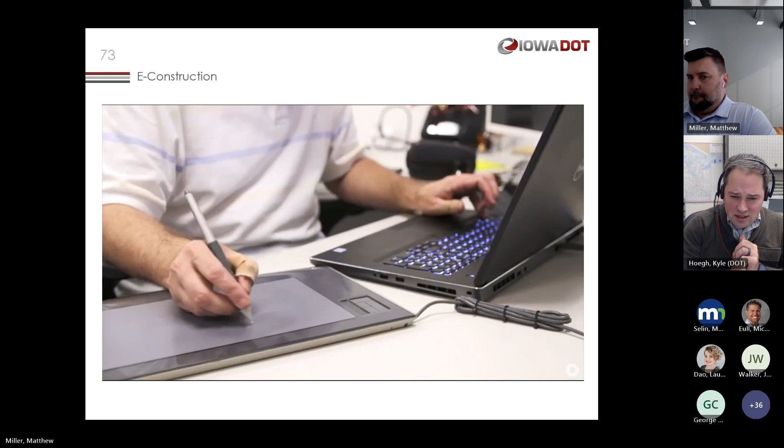Maybe not. We can only hear it through your mic when you're talking.

I wanted to show that I met with those guys and talked to them about IFC models. I moved this model around on my phone and it was so intuitive the way it moved. I said something like this would be great with an IFC model, and I gave them one, and they said, well, that's not really our focus. We focus on step-by-step audio visual directions.

It occurred to me as I was talking to them, why are we trying to do a whole bridge or a whole corridor with a 3D model? We haven't successfully done our standards, our IMs. Maybe starting with our road standards, some actual digital instructions, is a way to get contractors and our own people used to it without such a big push. If we want full implementation of 3D deliverables, I feel like we almost have to start at that level. So I put this in for a research project.

Hopefully, with any luck, I can do 4 or 5 different road standards with step-by-step directions, get the model in their hand, get them using the devices as a way to get people used to the idea of using a model. That's all I had to share.

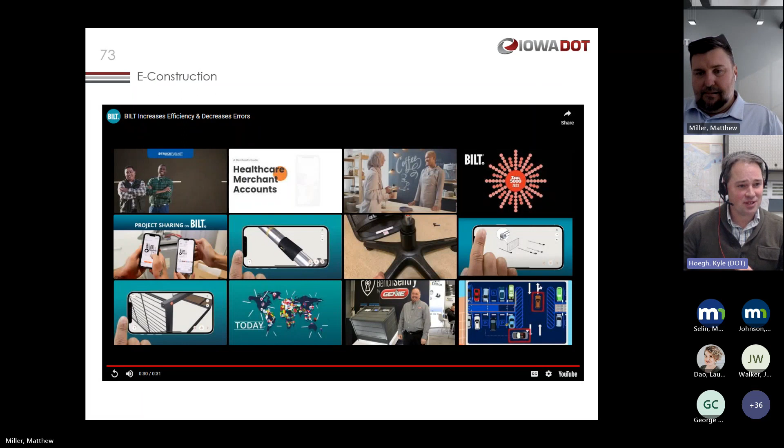Is there any questions? That was a lot of really good information. Thanks for taking the time. I'm sure Minnesota's not the only state or agency that's going to benefit from all the work you guys have been doing, and being willing to share your progress, what went well, what didn't, with the group.

We had a couple comments. Chris, did you have anything to add to your 'something to consider' comment? No, nothing really to add, but going back to the HEEP presentation from this summer, I think there's been a lot of this very nature being discussed again. One item I'd seen from past sessions was getting the CAD file standards set up to have those fields, using FME to move it so it's consumable by Esri.

I think that's another consideration. And if you're staying in the Bentley environment, Synchro reads that directly. So when you take that step back to your CAD standard, you may have to go a few steps forward or back before it gets to the e-ticketing, but that information should be able to carry forward. That was just a thought I had as we were talking, since it was pretty analogous to other work.

Paul was hoping he could also get his hands on the presentation. With regard to the recording, we'll include a link to a YouTube video of the presentation, and probably put a link in the meeting notes. Matt, would you be willing to share the slide deck too?